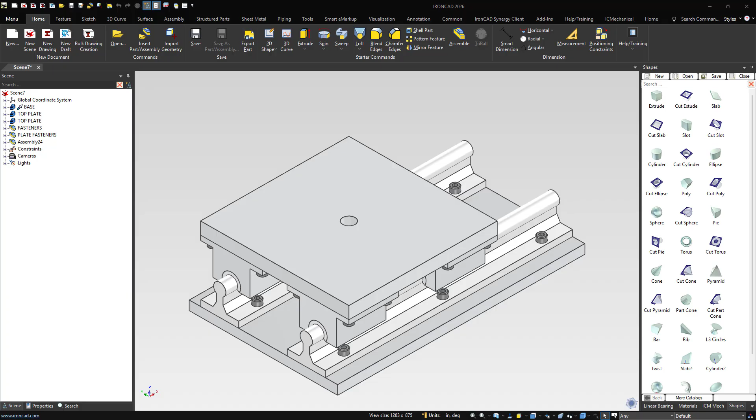Today we'll be diving into a new IronCAD series where we design assembly models together. We'll be designing a linear bearing model, providing step-by-step instructions for each part and showing how it's created within IronCAD. We'll begin with a simple model like this and progressively get more complex. However, if you have any design, drawing, or model you'd like to see designed in IronCAD, please send it in our comments.

We'll be using the catalog to store our parts within IronCAD's single scene for ease of access during the assembly process. At the end of each assembly, we'll show how IronCAD can also add constraints and create renderings of the model. So let's get started, and we'll begin by designing the bottom plate.

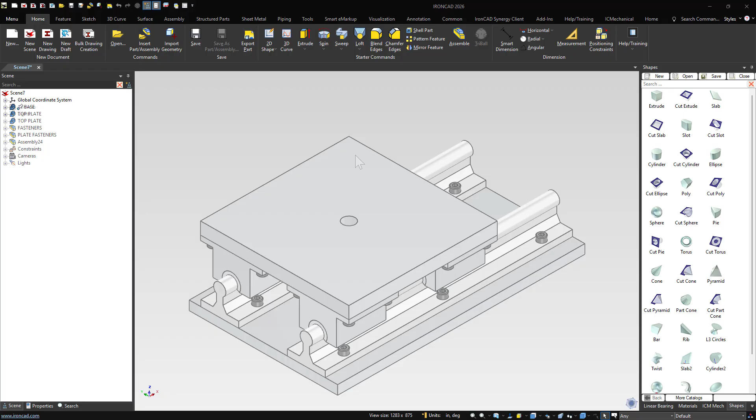So let's get started on the bottom plate. We'll bring out an extrude block and make it the correct length, which will be 10 inches. The width will be 6 inches, and we'll have the height adjusted to 3/8 of an inch.

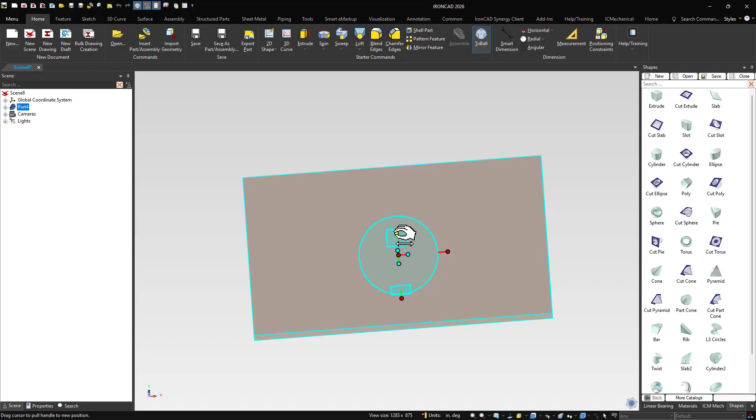We'll open up the TriBall and rotate this 90 degrees like so. Now what we need to do is add in the cut holes. These are the threaded holes that will connect to the guide shaft when we add the fasteners.

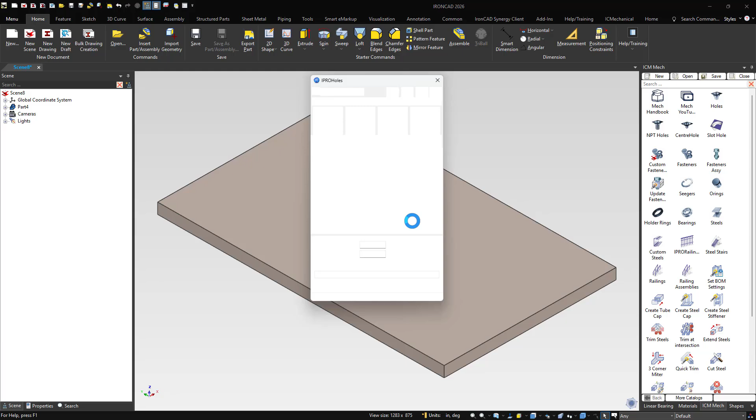So we'll go to our IronCAD mechanical, bring out our hole tool, and bring it to the middle here. For this hole size, we need 12 of number 10 by 24 of the coarse threads.

So we'll go with 0.19, and bring out 10-24 UNC. The total length or hole depth can be 3/8 inch as well. We'll keep the thread depth and thread pitch as normal here.

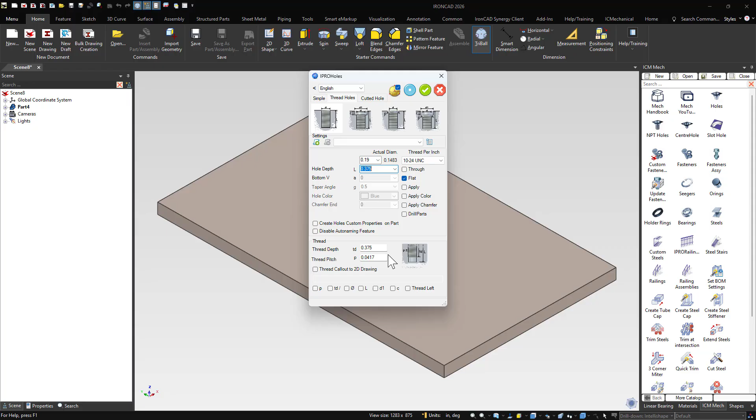We'll click this button here, the little blue one with the square. This will give us the preview. Perfect, so we'll click OK.

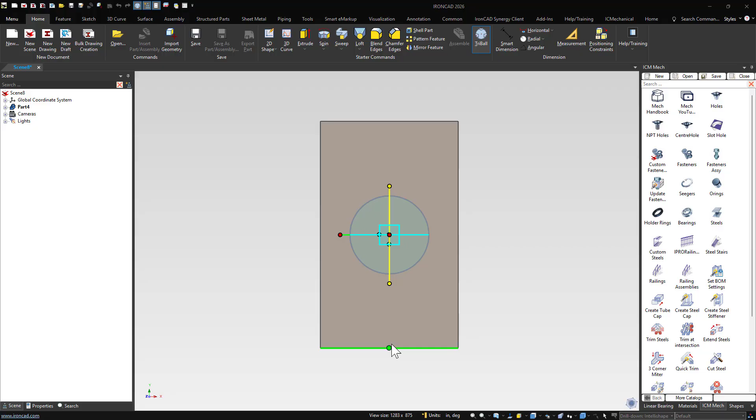What we'll do now is open up the TriBall and bring this down to the correct dimension. From the bottom edge, this will be 1 inch from the bottom. And from the side edge on the left side, we'll have this to be 0.75 inches. So this will be the start.

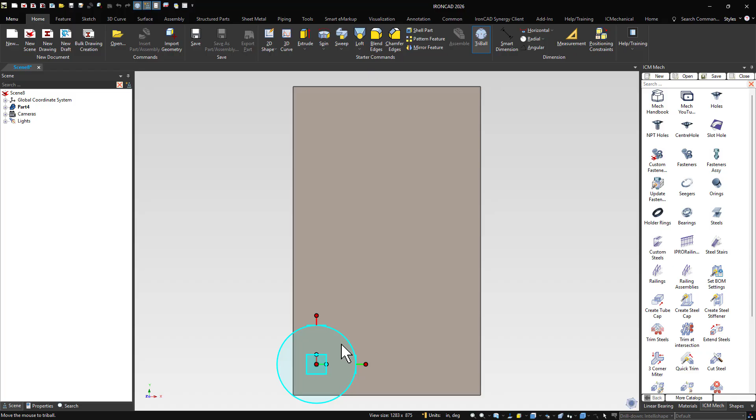Rather than going and adding 12 different holes, we'll use the TriBall to our advantage here. We'll open the TriBall, tag this axis, right click and drag, and we'll link it. We'll bring this here, link it, and have it be 1 inch in distance.

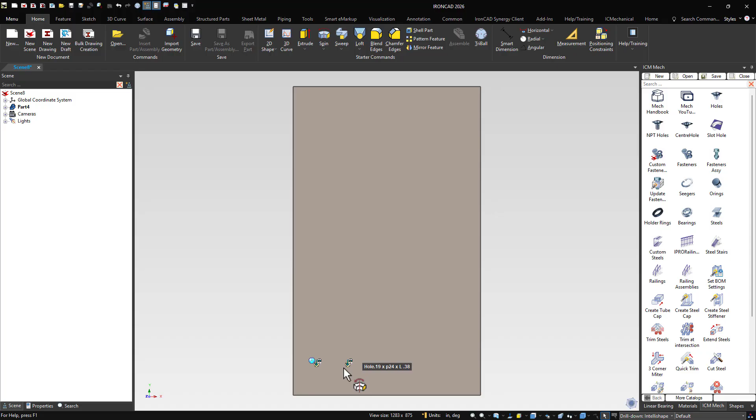What we need to do now is highlight both. So we'll hold shift, click and highlight both, then open up the TriBall once again.

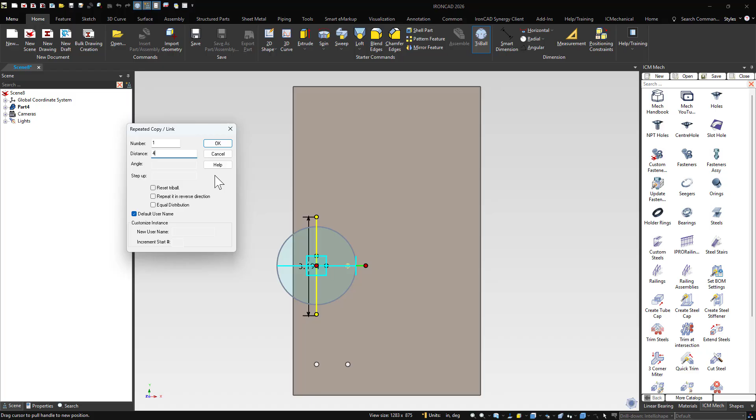We'll click on this axis here and bring this up 4 inches. So we'll right click, drag, bring the distance up to 4 inches, and click OK.

Then once again, we'll take these two here, click this axis, and drag it up to be 4 inches.

Next, what we'll do is mirror this on the other side. But rather than using the mirror tool and selecting all of them, you can simply mirror them with the TriBall as well.

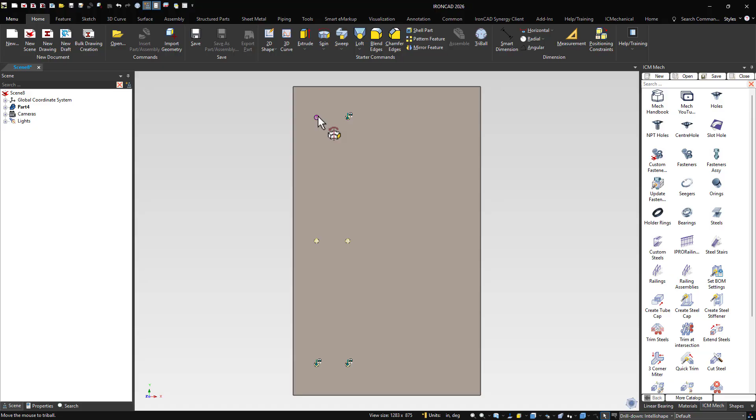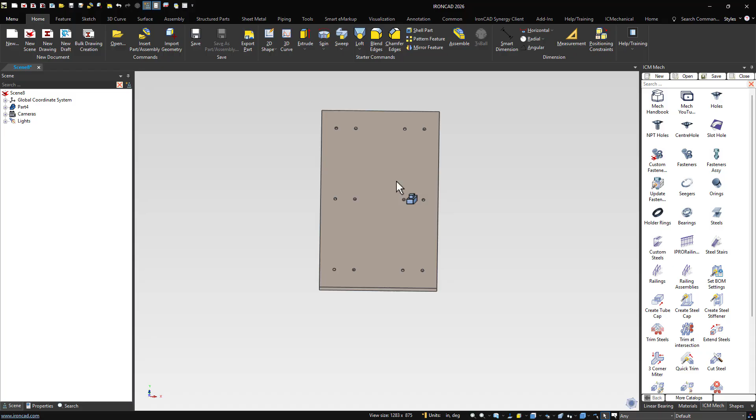So we'll hit space to open the TriBall, bring this down to the midpoint of this line, and click on this orientation anchor axis here. We'll right click and hit mirror and link. This will link and mirror the holes from this side over to this side as well. So this is the bottom base.

So what we'll do is name it bottom base, click OK. IronCAD allows users to take their parts and bring them into the catalog for ease of access.

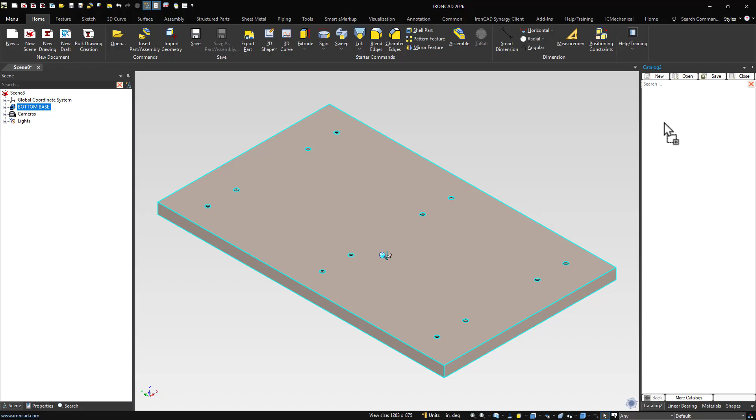So we'll open a new catalog and drag the bottom base inside. But before we drag it inside, we actually want to set our materials to make sure everything is set.

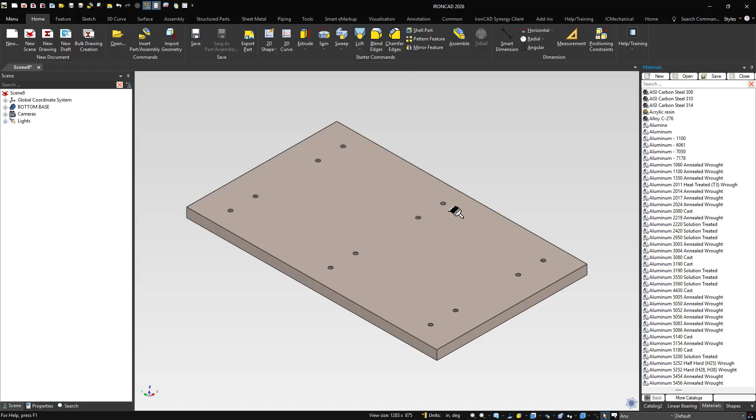So before going to this new catalog, we'll open up the catalog here and go to materials, and let's make this 6061 aluminum. Some surfaces of this part or assembly have individual surface styles—yes, we'll make sure that all of these surfaces are aluminum.

Okay, so now what we'll do is go to catalog, drag in the bottom base, and then we can hit save. So we'll go to the desktop, right click, and make a new file.

We'll name this the linear bearing. So we'll go here and save this as linear bearing assembly.

Okay, so now the catalog is named linear bearing assembly. What we'll do now is save the catalog once again, and this is the bottom base.